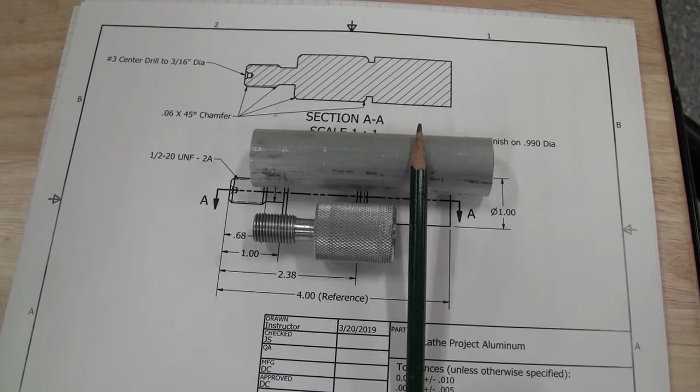But let's look at the plans and discuss how we're going to cut this. The workpiece for the aluminum bar is about 4 inches long, and we're going to do all the work with the aluminum bar sticking out from the collet somewhere in the neighborhood of 2 3/4 inches. We're going to do all the knurling, threading, turning—all the work to get this down to shape with that bar held in the collet like this.

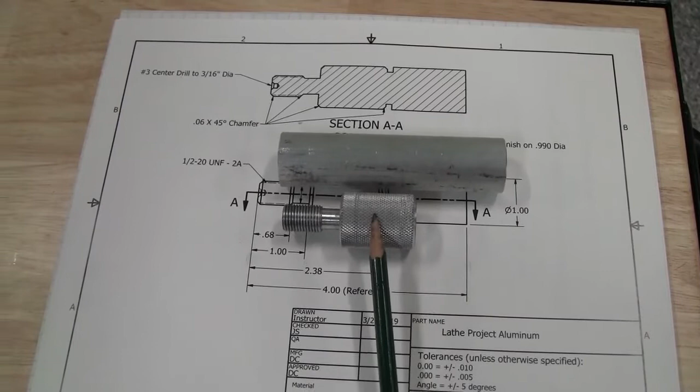When we're done with all this work, we're going to part this off and clean up the outside. So for our first step of knurling, we're going to take this bar.

If we look at the plans here, we can see the knurled portion is here, extended from the end about 2 3/8 of an inch. So what I'm going to do is prep this, and it's nothing you haven't seen before.

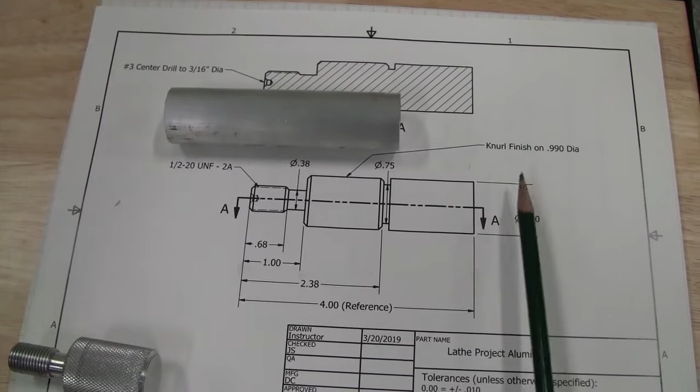I'm going to face this end and turn my diameter down to 990 according to the plans. Then we'll discuss setup for knurling and how you load the tool, and what settings we need on the gearbox to make this. So I'm going to clean this up and get it ready for knurling, and then we'll talk about knurling setup.

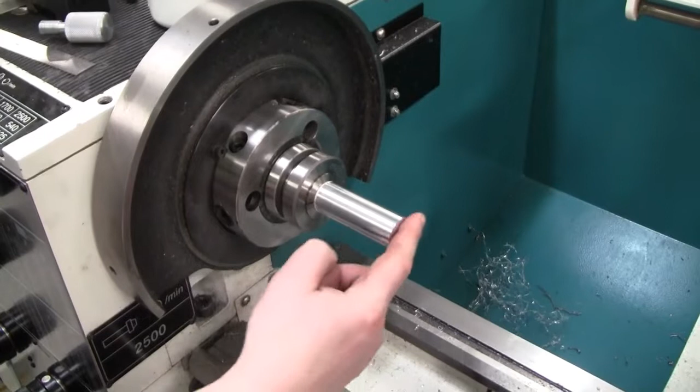All right, I've got the part ready for knurling. I'm going to walk you through setup real quick, but just to reiterate, I loaded the aluminum bar with about 2 3/4 of an inch sticking out. I faced the end to make it nice and flat, and then turned as much as I could to the 990 thousandths called out on the plans.

Our workpiece is in here like this, and what we're going to do is knurl the end here for a little bit. In fact, I might even knurl this whole part because we're going to turn all this away. So I'm going to show you how to set up the knurling and how to adjust our power feed, because we're going to use the power feed feature on the machine to apply the knurling pattern.

This isn't something we can apply by rotating and moving the carriage by hand—we need something very, very consistent to do that. So I've got our knurling tool. This is a scissored knurling tool. We can screw this knob in or out to close the distance or gap between the two knurling wheels. So we're going to load this like any other tool.

Okay, now the trick with these is we want this knurling tool to be as close to perpendicular to the axis of our workpiece as we can. So you could use a square to do this, or a quick and dirty way is to use the faced end of the workpiece to help you out.

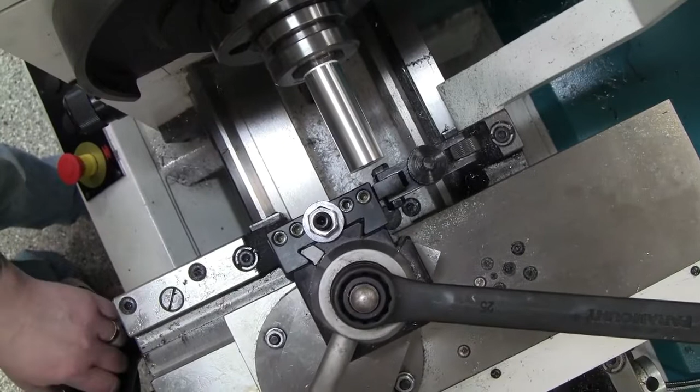So I'm going to loosen up the tool post, move the knurling tool in, and simply use the end of the workpiece against the edge of the knurling tool to get me pretty close to square.

All right, so now I've squared the knurling tool up so it's at a right angle to the axis of the workpiece. Okay, the next thing I need to do is line up the knurling tool so that the axis of the two wheels and the axis of the workpiece are in line with each other vertically.

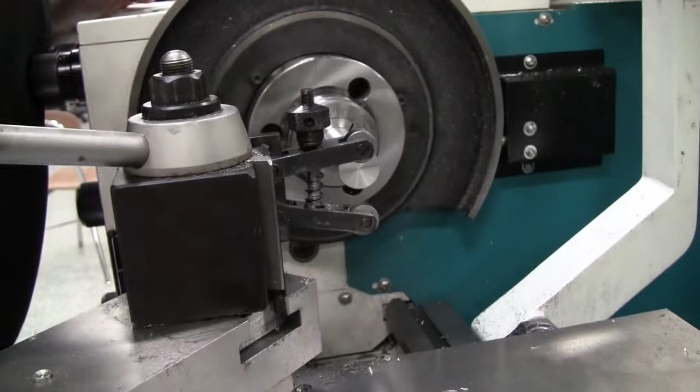So I'm going to bring the workpiece over, and I'm just going to eyeball this. It doesn't have to be perfect, but we want all of these to be close, or as close as we can get, in line with one another. I think that's probably pretty close enough for what we're doing. The bottom one might be out a little bit far, but that'll adjust when we start tightening this up.

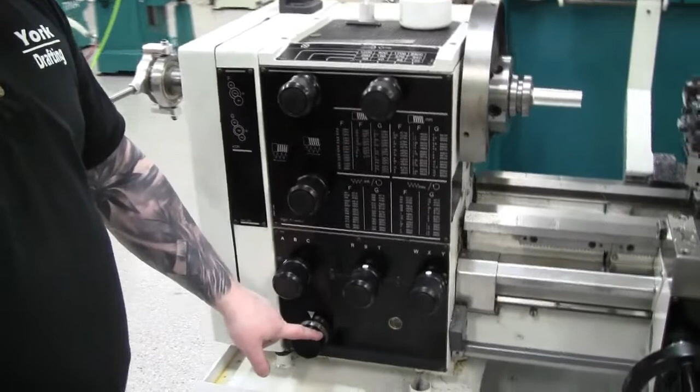All right, now I said we're going to use power feed, so we have to set our gearbox down here to a specific setting. There's a chart that tells you the combination of gears and what feed rate that'll give you. The feed rate is listed on the left, in inches per revolution. We're going to shoot for 16 thousandths of an inch per revolution, which is B R 4 X.

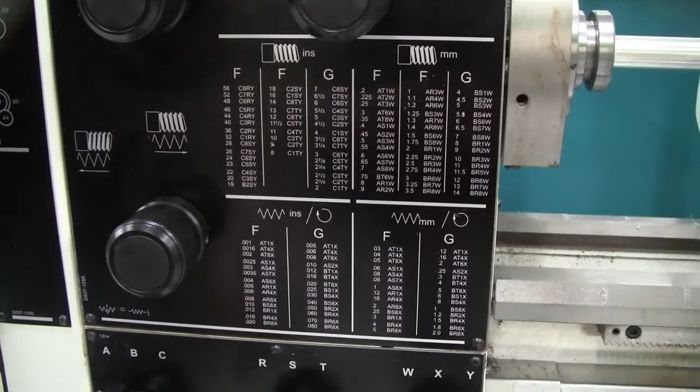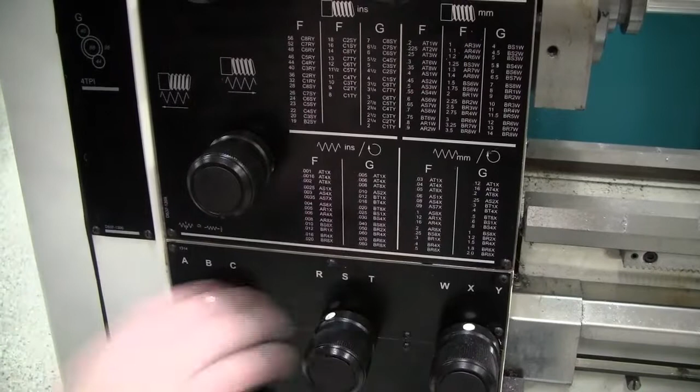So I'm going to set my gearbox to B, and if it doesn't go, you're going to kind of have to fidget with it a little bit until you can get it to lock in here. There it goes. Okay, so I've got B, R, X, and the number 4 down here.

Now what that means is for every rotation of the spindle, the carriage is going to move 16 thousandths of an inch. Knurling, because it requires so much pressure and force to make that diamond pattern form into the workpiece, we're going to do this at a very low speed.

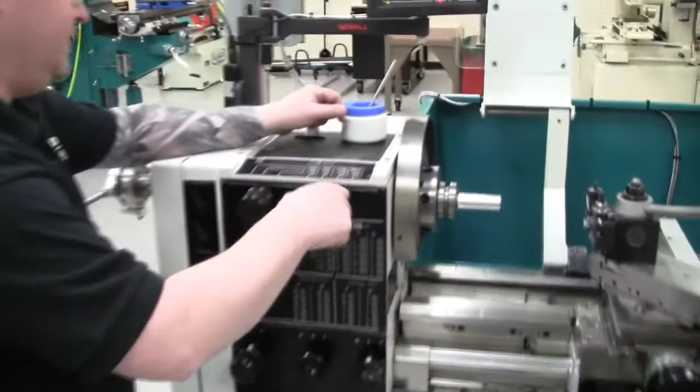So normally we've been working around 1200, 800 RPM. We're going to turn this down to 260 RPM. Okay, so it's nice and slow, and we can control our feed as best we can.

So we've got the gearbox set to the right speed, and the RPM set to the right speed. When we knurl, we have to think about the direction we're going to knurl. For this operation, we're going to start by the headstock and knurl to the right, which means my power feed has to go to the right.

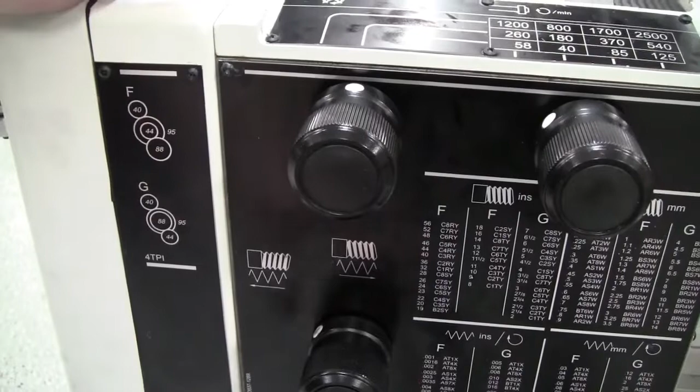And that is controlled right here. So right now, I am set to feed left, but I want to feed right, so I'm going to switch that so I'm feeding to the right.

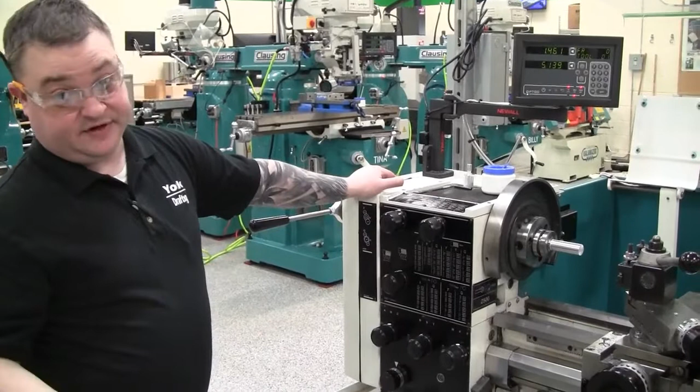Now, it's always a good idea to double check your settings before you start cutting. So what I'm going to do is move the carriage out of the way, turn the machine on, and engage the power feed to ensure I'm moving at the feed rate I think I'm supposed to, and in the direction I want to move. Our power feed is this knob right here.

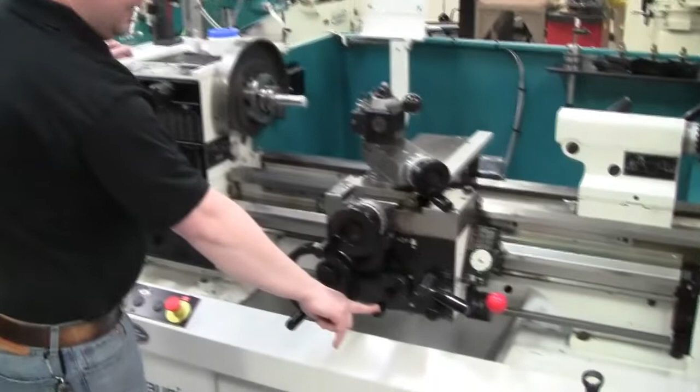Okay, when we turn the machine on, we will lift it up to engage power feed, push it down when we are done with power feed. Anytime you are using power feed, your hand stays on the knob there. The power feed doesn't have an automatic shutoff, so if you don't shut it off, it's going to keep going to the right, or keep going to the left until something breaks.

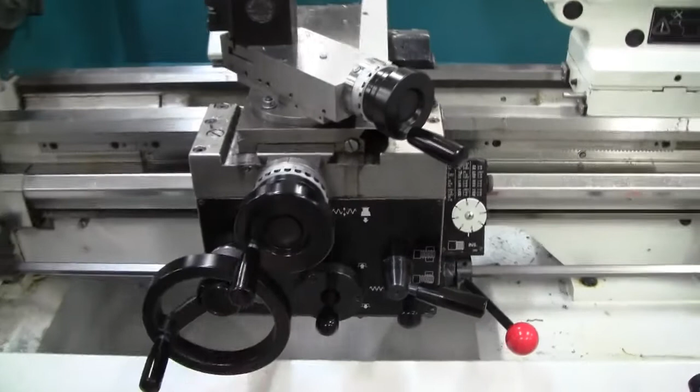So let's check and make sure we're going the right way. I should be feeding to the right, and I can see I am indeed feeding to the right, so that setting is good.

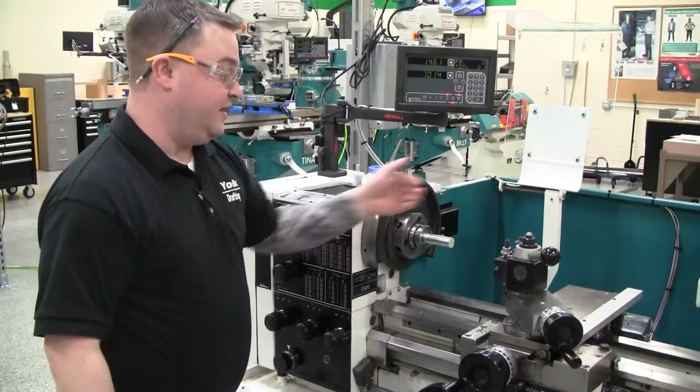I am just about ready to knurl. I'm going to make sure I have a couple of things ready, and then I will show you how to go ahead and knurl. So we've set our tool perpendicular, we've set our tool in line with the axes of the workpiece, we've set our power feed, or our feed rate, we've set the direction, and our RPM.

You are going to need the little bar that comes with the knurling tool, because we're going to use that to apply extra pressure to force the knurling pattern in, and you'll need lubrication or oil. Since we're not cutting, we're forming. This process can create a lot of heat, and we need to dissipate that heat and lubricate the wheels and the workpiece as we're cutting. So I'm going to get everything set up, and then we'll walk through how we're knurling.

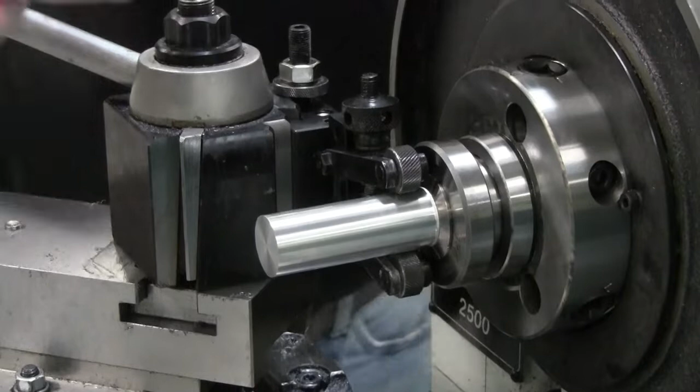All right, we are all set up. I've got my knurling tool as close to the collet and headstock as I feel comfortable, and I've got myself fed in to the correct center line of the axis of our workpiece. I'm going to turn the machine on and tighten this knob until I see the knurling wheels start to turn, tightening as far as I can by hand. When I can't tighten it anymore, I'll grab the little bar, place it in one of the holes, and continue tightening until I feel I've exerted enough pressure. This is kind of a by-feel thing, but it's going to be fairly tight.

Once I have it tight, I'm going to engage the power feed and let the machine feed automatically until I have about half a knurling wheel sticking beyond the end of my workpiece. At that point, I need to do two things pretty quick: shut off the power feed and shut off the machine. That way I don't over-imprint or stay in one place knurling too long.

So we'll come back here as close to the collet as I can. I've got my oil ready to go, and my bar right here. A word to the wise: when this knurling tool starts to contact the workpiece, it's going to spin. You have to be very careful where you put your fingers and things while this is going, because anything that gets sucked into these knurling tools is going to come out as goop on the other end.

So I'm going to take a second, lubricate the wheels on the knurling tool, and apply lubrication down the length of the workpiece. I'm going to turn this on and engage or tighten up my knurling tool here, first by hand as tight as you can go, then with the bar. Now you should be able to see that knurling pattern starting, so that's about as far as I'm going to go. Engage power feed.

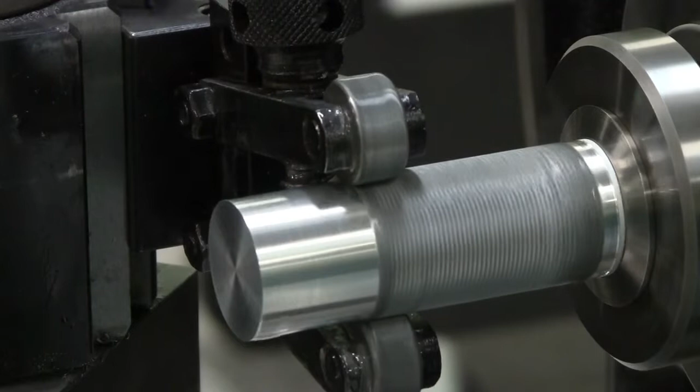Hand stays on the power feed knob, and I will stop it when half of the knurling wheel comes off the other end of the workpiece. I like to watch the bottom wheel—that gives me a good idea when I'm at a point I need to stop. And it's going to be off with the power feed, off with the machine.

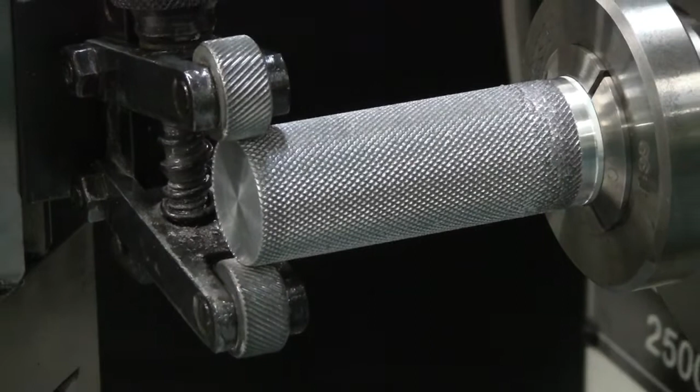Before I change anything or remove this, I'm going to inspect the knurling I've just created and make sure it is good. If it isn't, I still have an opportunity to come back and clean up that pattern. But looking at this, the diamond pattern looks pretty good. It's a little weird up here where I tightened this on, but a lot of that's going to get turned off in the end. At this point I am comfortable with what I've got.

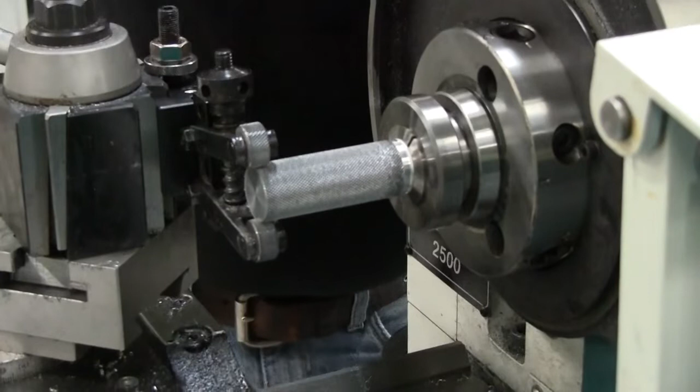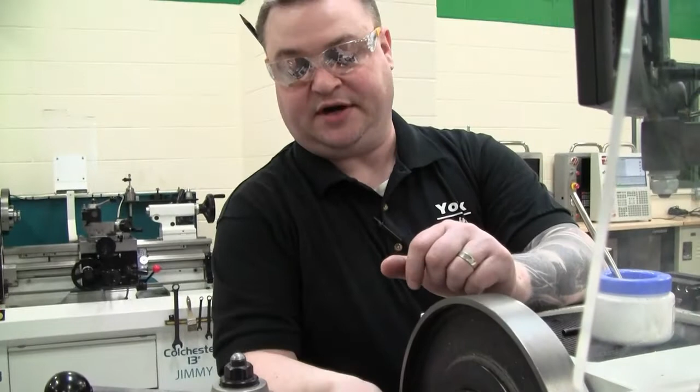I'm going to go ahead and loosen up the knurling tool and back it off, and I have now completed knurling that workpiece. So that, folks, is how you knurl. Next up, we're going to turn the end of this down, and we're going to talk about threading and how you put threads on the outside diameter of a workpiece.